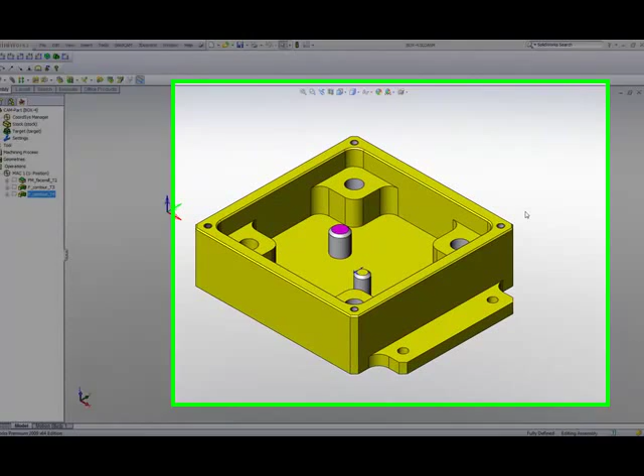In our previous lessons we had completed the machining of the outside boundary of this part itself, and what's left to do still on the outside of the boundary are the steps that are on both sides. Now, what I'm going to do is mill these steps, but I'm going to use a tool that is actually smaller than the width of the step, and we'll use the option of clear offset to clean the entire step.

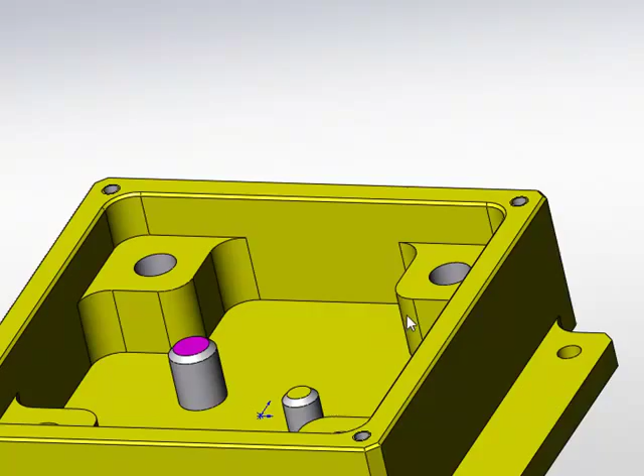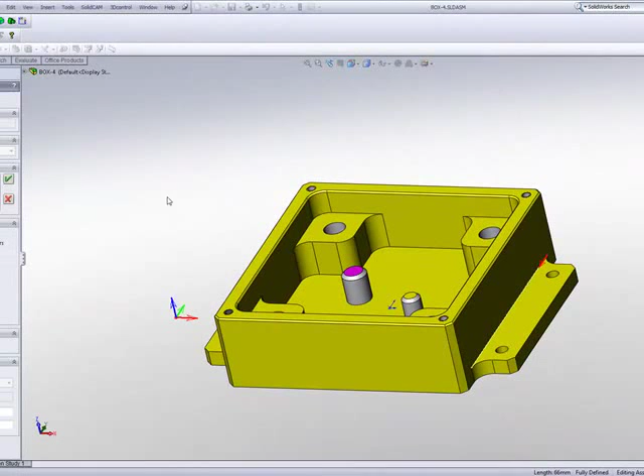So I'll start off with a new operation of profile, and in my geometry, I'll choose this line here as my first chain in geometry. Make a note of the direction. That's the direction I want to work in, and I'll simply say OK, and then I'll just simply flip around to the other side and click on this line over here and say OK. I've completed my selection. Now I'll continue with the tool.

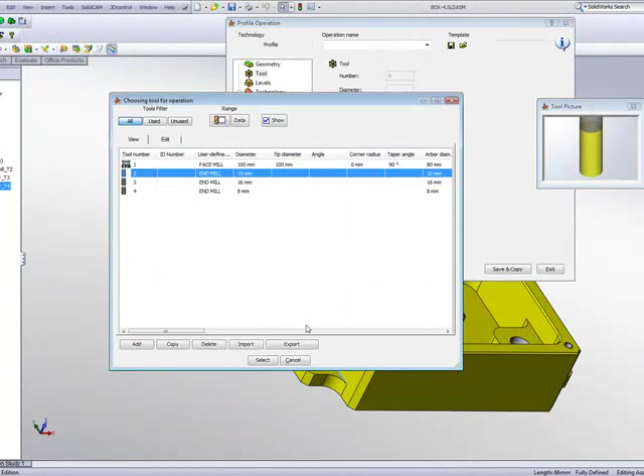The tool that I would like to use will be my 10 millimeter end mill, and my levels, my upper level will be the top of the part over here, and the profile depth will be up until the step itself, and I'll accept that, and you'll note the step is at 20 millimeters in depth.

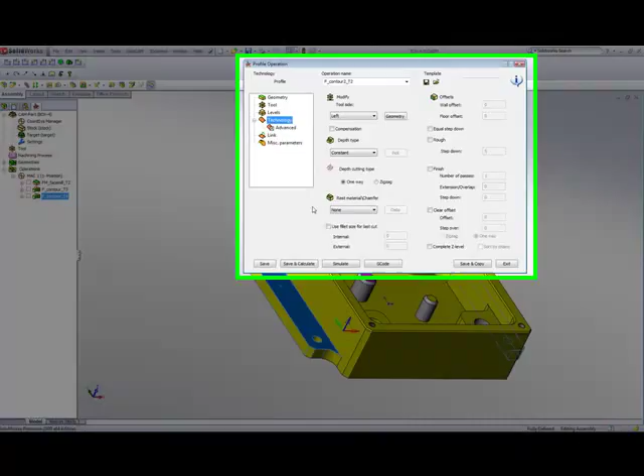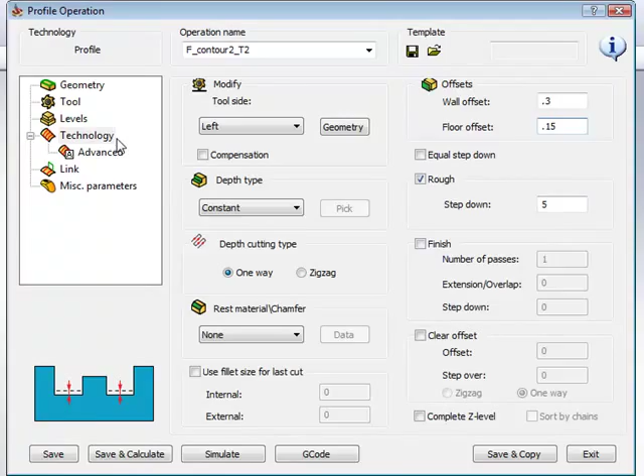Now in my technology field I'll be using my rough cut, and I'll leave 0.3 millimeters on the wall, and since I'm working on the step over here, I'll leave a floor offset of 0.15 millimeters as well. Now my step down will be every 5 millimeters, and since the step is 12 millimeters but my tool is 10 millimeters, I'll use the option of clear offset. Clear offset will allow me to start further away from the geometry and then work my way in.

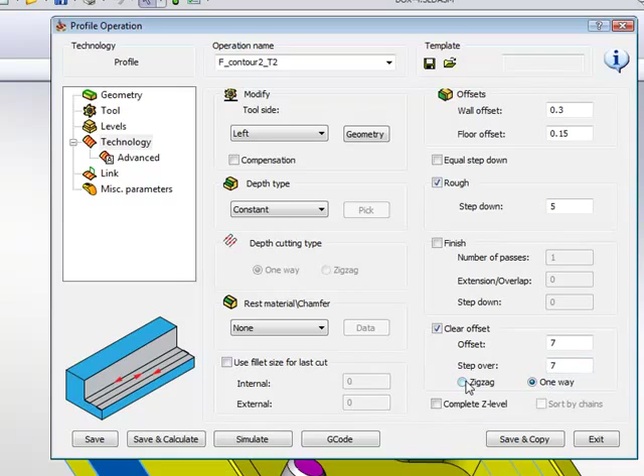So I'll start with an offset of, say, 7 millimeters, and I'll step over every 7 millimeters as well. Now I can either choose to do one way as shown over here, or zigzag, going back and forth. I want to choose the option of one way.

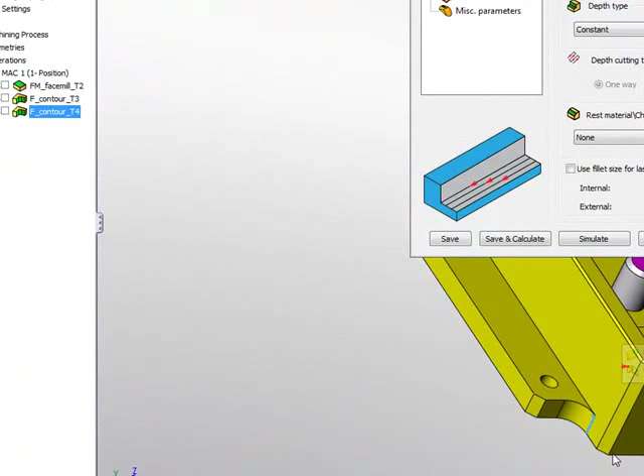Now one more thing I'd like to do in my geometry is, since my geometry started from this point over here, on this corner over here, I'd actually like to extend my geometry on both ends. So I'll go back into my technology, and in my modify area I'll click on geometry. Now I'll choose my first chain, and I'll simply say OK.

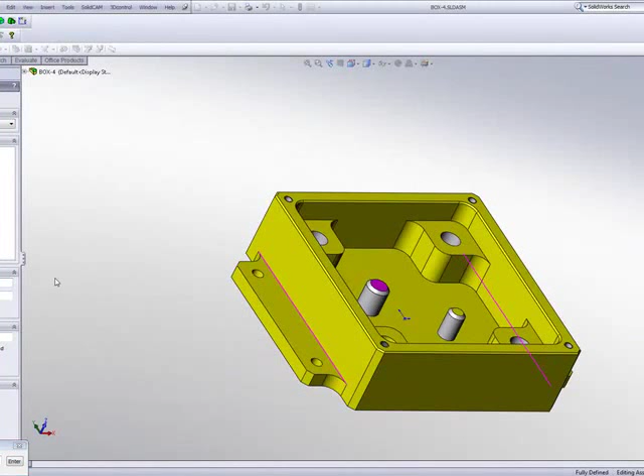At the start I want it to start at 5 millimeters away. I'll just take that at the top view, and at the end I'd like to do also another 5 millimeters as well, and I'd actually like to apply that to both my geometries. I'll say apply to all, and I've extended both of them.

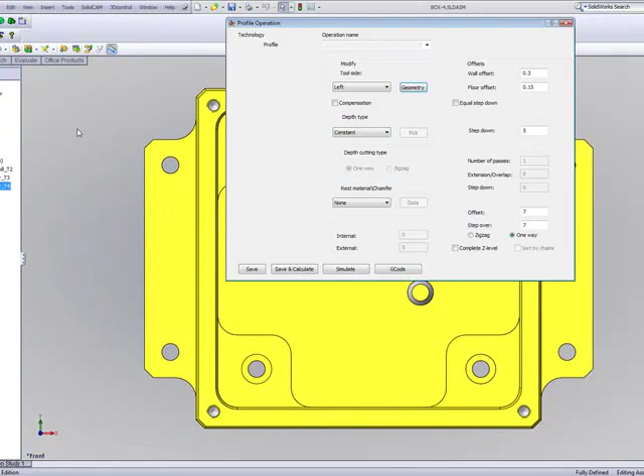I'll simply say OK. Now we'll do save and calculate, and when we take a look at our simulation, and I'll use the SolidVerify simulation this time, using the isometric view, you'll see that my tool goes down. Now it's clearing away each step at a time.

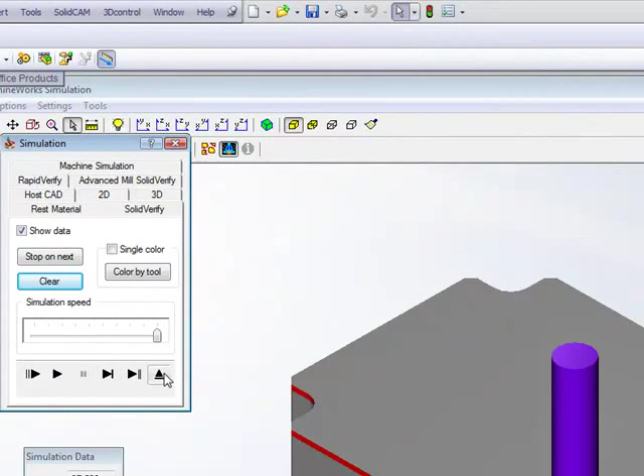What I can do to change that is simply say complete Z level, because I wanted to complete the Z level before going down, and also do it by each chain. In other words, do it one chain at a time, complete the Z level until you get to the bottom, and then go over to the next chain.

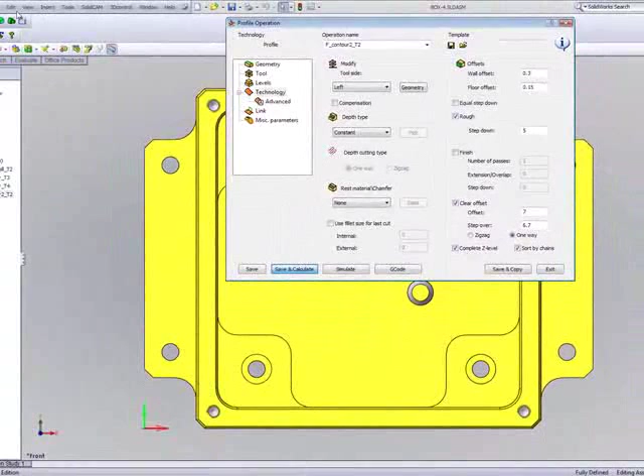If I now do save and calculate, and then simulate using a SolidVerify simulation, you'll see that the tool now is going down, clearing the Z level on that step, but staying on that step, and then doing the same thing on both sides.

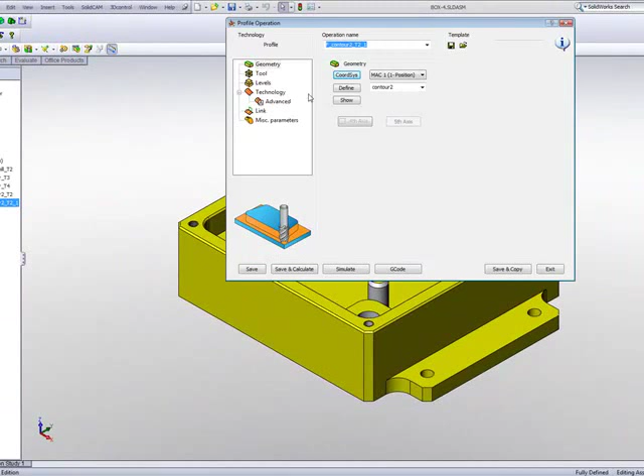Now to complete the step I'd have to do another operation for finish, so I'll simply do save and copy on this operation, creating a new operation based on the previous operation. I'll change my tool, and I'll be using my 8 millimeter end mill for the finish cut. My levels will stay the same.

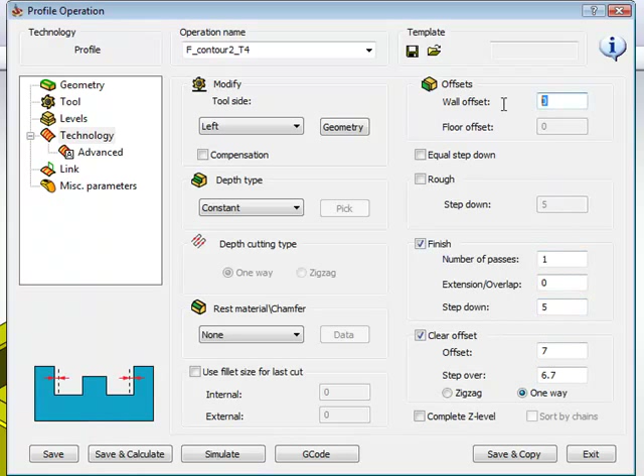In my technology area, I will not do rough. I won't use this sort by chain and complete Z. What I will do is I will use my finish cut. And in my finish cut, first of all, I'll be going down again every 5 millimeters. But you'll note also, since I'm doing a clear offset, my offset on top is open. And I'm going to actually put in here what my previous offset was.

The reason for that is simple. When I do my clear offset, I want it to work only on the floor up until 0.3 millimeters from the wall, and then it will complete the wall from the top to the bottom.

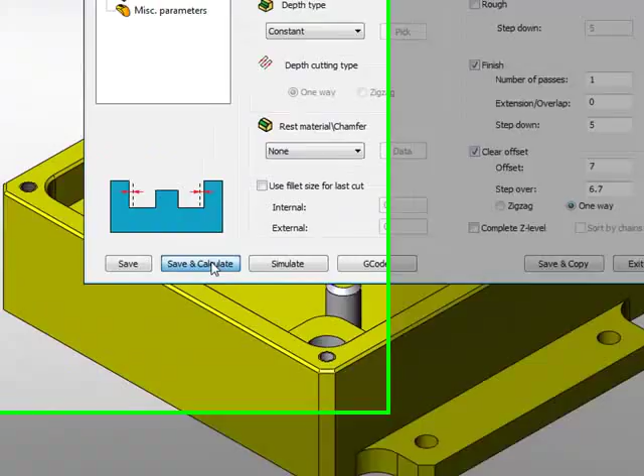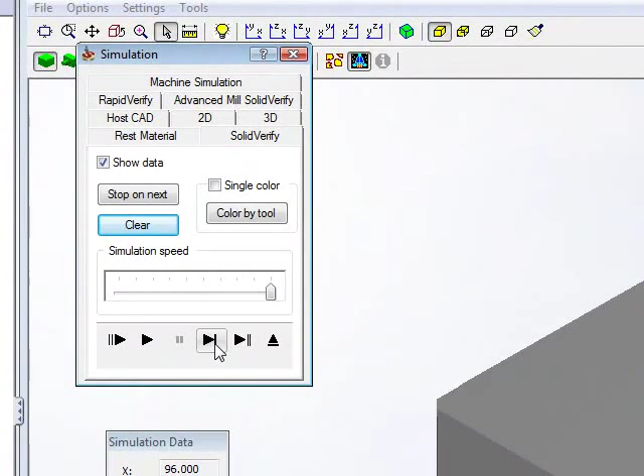Let's take a look at our simulation as this is done, and I'll use my SolidVerify simulation for this. You'll see that my tool will complete the floor up until just before the wall itself, and then work on the wall itself, and doing this on both sides as well. This completes our lesson on profile machining.